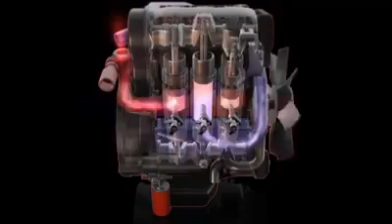Hello everyone and welcome. In this video we're going to be discussing the rather unique opposed piston engine that Achates Power is developing, which has shown to have pretty impressive efficiency figures.

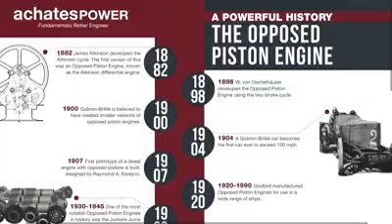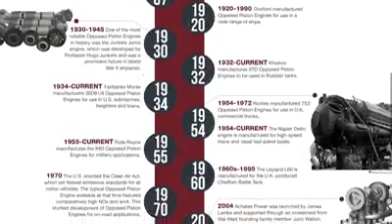Now the first opposed piston engines date back to the late 1800s, and they've seen use in ships, airplanes, submarines, tanks, trains, and other forms of transportation ever since. Rolls-Royce even developed an opposed piston engine for use in military applications in the 1950s.

Having a look at the engine, you'll see that two pistons move towards one another, meeting at top dead center where combustion then occurs. These engines operate as two-stroke engines, meaning every single time the pistons join in the center, the power stroke occurs, unlike four-stroke engines.

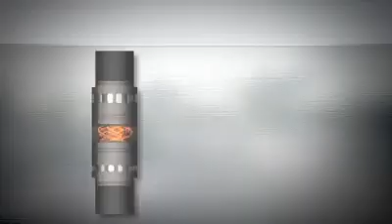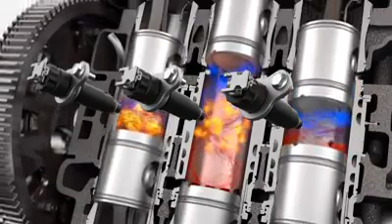The basics of how this engine works is fairly straightforward. When the pistons reach bottom dead center, fresh air is pumped in through ports on the bottom of the cylinder, while the exhaust is pumped out through ports on the top of the cylinder. The two pistons then move towards one another, and just before meeting in the center, diesel fuel is injected directly into the cylinder. There are two injectors for each cylinder, both facing one another on opposite sides. Combustion occurs, pushing the pistons back out, and then the cycle repeats itself.

The top pistons and bottom pistons each rotate an individual crankshaft, and these two crankshafts are then geared together to supply power to a single output shaft. Now, while having two crankshafts may seem like an additional complexity, this engine has no valve train, meaning no camshafts, rocker arms, valves, valve springs, and even no cylinder head.

This particular engine we're looking at is the Achates Power 2.7 liter 3-cylinder engine, which is good for 270 horsepower and 480 pound-feet of torque.

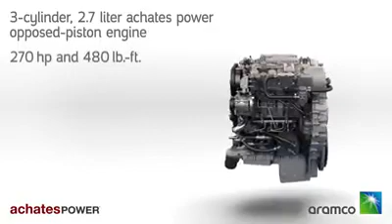What makes this design efficient? Well, with the lack of a cylinder head, the amount of surface area that the combustion is exposed to relative to the volume of the combustion chamber is significantly reduced. Instead of transferring heat to a cylinder head, that heat is sent to an opposing piston, so more heat is used to generate useful work.

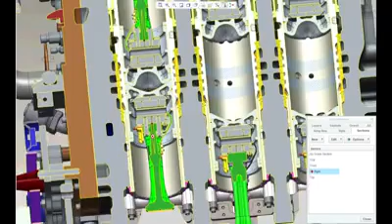Also, by splitting the total stroke length between two pistons, you're able to have a very high stroke-to-bore ratio without super high piston speeds, helping to extract as much useful work as possible. It's also possible to create an ideal combustion chamber with both piston tops, helping to create a fast-moving mixture and quick combustion. The two-stroke engine is supercharged to control intake air pressure, and it's also turbocharged.

The intake and exhaust ports are designed to optimize airflow scavenging. The exhaust ports are open first, allowing higher pressure exhaust gases to begin to exit. Once pressure has dropped, the intake ports are exposed and fresh air flows in while the remaining exhaust gases are pushed out. Both ports are closed off as the pistons move towards the center, and a small amount of residual exhaust gas is left behind.

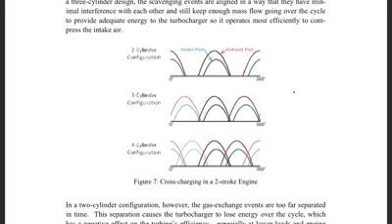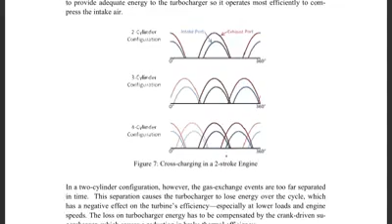You might be wondering why the engine has specifically 3 cylinders. From an efficiency standpoint, this is found to be the ideal setup. With just 2 cylinders, there are gaps in exhaust delivery to the turbocharger, which reduces overall efficiency, especially at low loads and low engine speeds when you're not producing much exhaust. With 4 cylinders, there is too much overlap between the exhaust ports opening in one cylinder and the intake ports opening on a different cylinder. This results in additional residual gas being left behind, decreasing scavenging efficiency, which reduces overall efficiency.

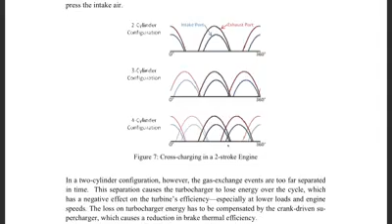Now, that's not to say that the engine can't be used in other layouts. 2, 3, 4, and 5-cylinder options are all acceptable, and Achates Power has worked on developing a 4-cylinder engine for combat purposes, but from an efficiency standpoint, 3 cylinders remains ideal.

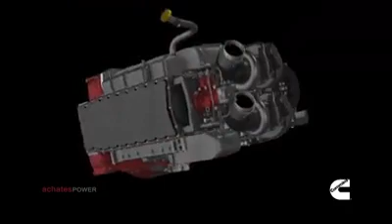Speaking of efficiency, test results show brake thermal efficiency remaining above 40% across a wide variety of loads and RPM, peaking as high as 46%. Indicated thermal efficiency doesn't dip beneath 51% for the various loadings tested. So the advantage here isn't just that the engine is super efficient, but that it remains efficient across a wide range of RPM and loading.

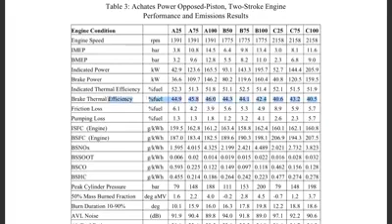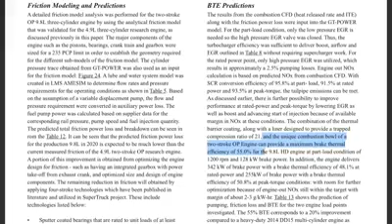Now, these efficiency numbers were achieved in 2012. Studies published in SAE as recent as 2017 have shown that brake thermal efficiencies as high as 55% are possible using 3-cylinder opposed piston diesel engines.

So the next and most obvious question, will we ever see these engines in production vehicles? Obviously, adopting new engine technologies can certainly be a risk, but we just might see them in the near future, as reports from the 2017 Detroit Auto Show indicate that 9 automakers have signed on as development partners, and at least one of them has started to implement tooling for producing an opposed piston engine in greater volumes.